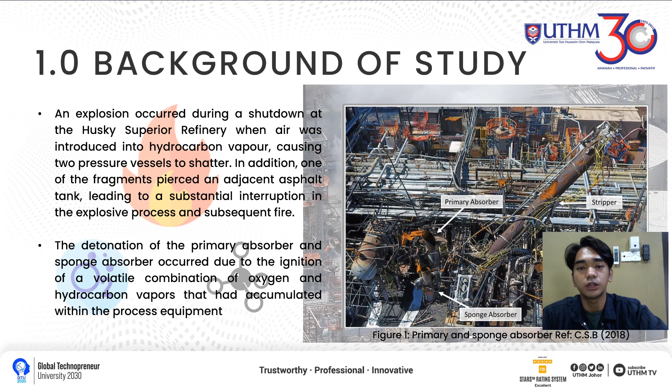The plant was scheduled for shutdown and the fluid catalytic cracking (FCC) unit was involved. At first, the regenerator continued functioning at higher pressure than both the reactor and the main column. As you can see here in figure 2, the airflow through the FCC unit caused the explosion. One of the slide valves between the regenerator and the reactor had erosion, creating an unblocked pathway for a significant amount of air to enter the reactor.

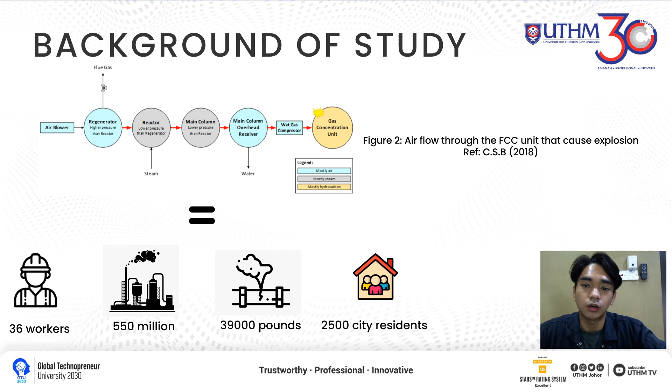When air continued to flow into the process unit and mixed with hydrocarbon, it caused the explosion. As a consequence, this event resulted in injuries to 36 workers and caused 550 million in damage to the plant. In addition, over 39,000 pounds of flammable hydrocarbon vapor were discharged into the atmosphere, leading to the evacuation of nearly 2,500 city residents.

Next, we move to the second subtopic, which is the direct consequences. So there are 3 points that will be discussed. The first one is the infrastructure failure. For the infrastructure failure, there are 3 equipments involved. The first one is the slide valves between the regenerator and the reactor, which had erosion, creating an unblocked pathway for a significant amount of air to enter the reactor.

The second equipment is the 2 vessels, which are the primary absorber and sponge absorber vessels. And the last one is the asphalt tank, leading to a spill of scorching hot asphalt through the refinery. The second point is the costs. The incident caused 550 million in on-site property damage. As a consequence, the organization must perform chemical cleansing and stabilization on the refinery equipment.

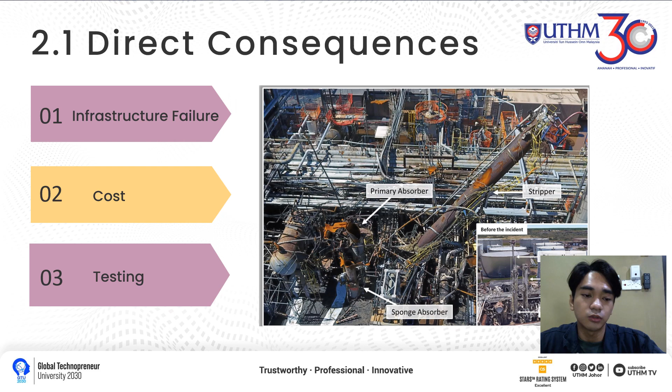The third point is testing. A metallurgical study must be conducted on the primary and sponge absorber vessels to analyze the cause of the incident.

For the indirect consequences of the incident, there are 3 points. The first point is fines. As you can see here in this article from the Associated Press in 2018, OSHA has fined Superior Refining Company more than 83,000 for safety violations related to an explosion that injured dozens of people and led to the evacuation of the city.

So the second point is the environmental impact. Due to the incident, numerous flammable hydrocarbons have been released to the environment, and the flammable hydrocarbons will cause a lot of pollution and endanger the safety of the people, which is point number 3. Besides that, due to the explosion, the neighboring citizens needed to be evacuated, and their safety was in danger due to the explosion.

So next we go to the form of corrosion and damage mechanism. For the form of corrosion mechanism, the first one is erosion corrosion at the slide valve, which is degradation of material from a surface due to the flow of fluid containing solid particles. And the second one is brittle fracture of the vessel, which occurs under stress or temperature where some point of the surface had already weakened.

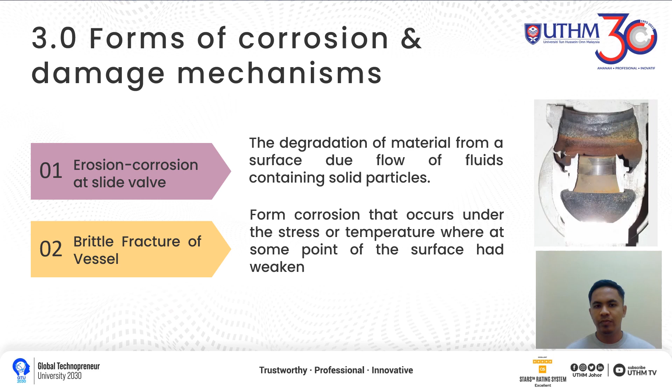Then we go to the next, which is the precautions that the owner should implement. So the first one is inspection and monitoring, which is the process of using various techniques or methods to detect, measure, and prevent corrosion in industrial systems and structures. And the second one is coating and painting, which is applying a protective layer on the metal surface to prevent or reduce corrosion.

And the last one is emergency response planning, which is a set of procedures and actions that need to be applied during an emergency. So from that, we can reduce any losses or any negative impact to the company.

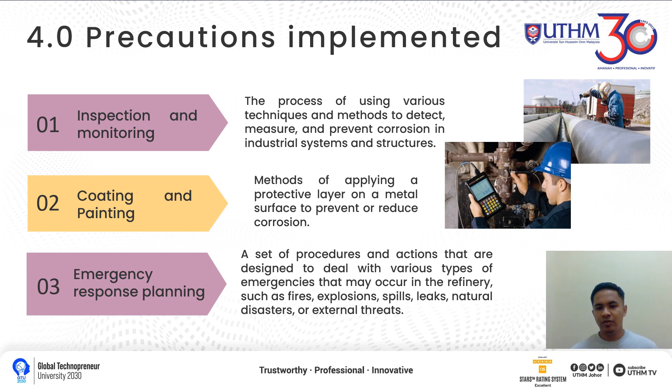Now I'll present about the prediction of losses that may occur. So the first point is impact on the environment. So when the explosion happens, the hazardous chemicals used in this process will be exposed to the environment, which is to the air, to the water and soil, and affecting humans in the surroundings.

So air pollution may result from this explosion releasing hazardous chemicals. The impurities can harm air quality and respiratory health. And the fallout from the explosion can contaminate soil, and later effects on soil quality and plants may occur.

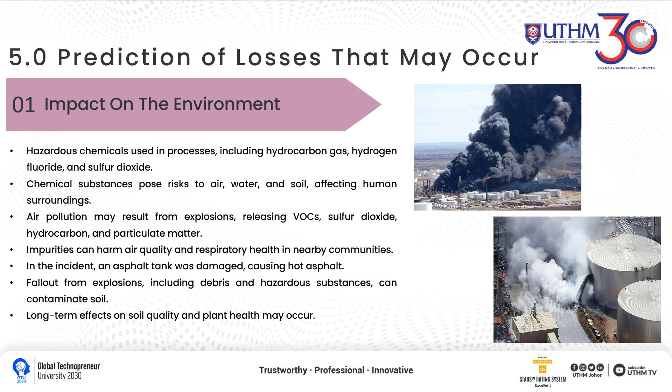So the second point is the negative impact on company reputation, and the sub point is the safety concern of the company. So when the corrosion accident occurs, it is a signal of the company's maintenance and safety protocol failure. So this will raise doubt about the company's commitment to infrastructure protection, impact the safety culture, and the public will question the company's dedication to a secure work environment.

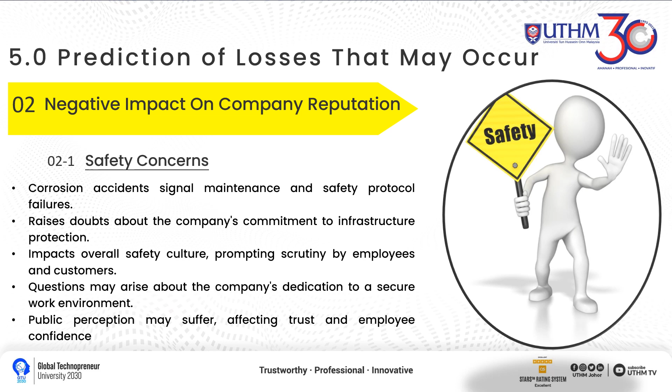So the second sub point is the media coverage. So accidents, especially those affecting the environment or safety, will get a lot of attention from the media. So this media coverage will shape public opinion and may harm the company reputation. So effective communication demonstrates accountability, builds trust, and enhances the company's integrity.

And the last sub point for point number 2 is lasting brand harm. So when the corrosion incident has lasting consequences on the company reputation, regaining trust from customers or stakeholders requires time and focused effort. So this will shape long-term company perception and influence stakeholders. And continuous commitment is needed to restore brand integrity in the competitive business environment.

So the last part is the inspection method that can be done. So the method is non-destructive testing. NDT is a test that can be done without causing damage to the parts being tested. So this method helps to identify defects, thereby ensuring their integrity. So the sub point for NDT is visual inspection. It is a direct inspection of the surface of the part that we want to inspect. This method is a useful tool for quick and direct evaluation of the part that we want to inspect.